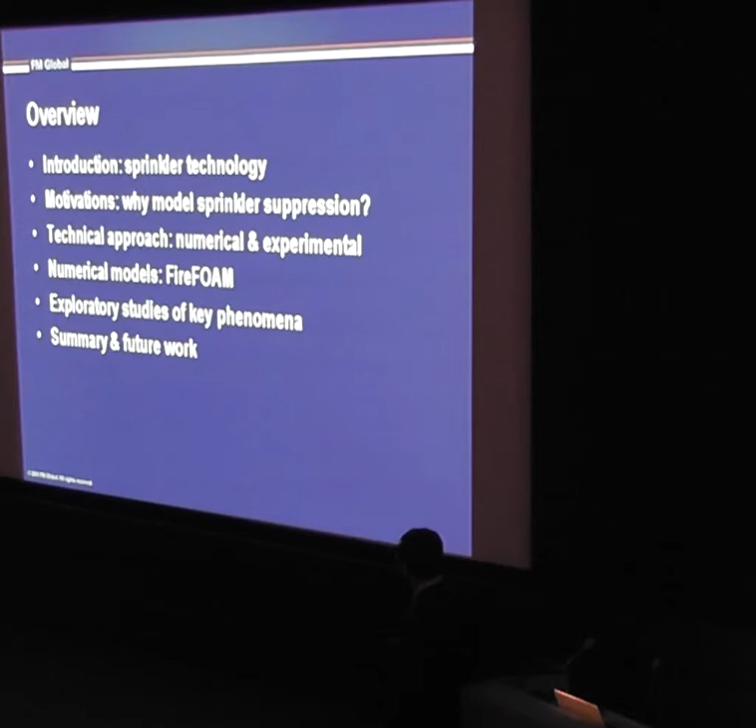The approach that we're taking is a combination of experimental technique and numerical methods. I will describe the numerical model in a very short time because my work is pretty much focused on the experimental side. So I will spend most of the time talking about the exploratory study for the key phenomena and the physics associated with them. I will summarize the work that we have done so far and show you some of the ongoing work we're still doing at FM Global.

First of all, many of you know FM Global. For those not familiar with us, we are one of the largest commercial property insurers in the world. We have about 1/3 of the market in North America, about 1/4 of the market in the world. So our experience is sort of representative of the application of sprinkler in the industry and commercial buildings.

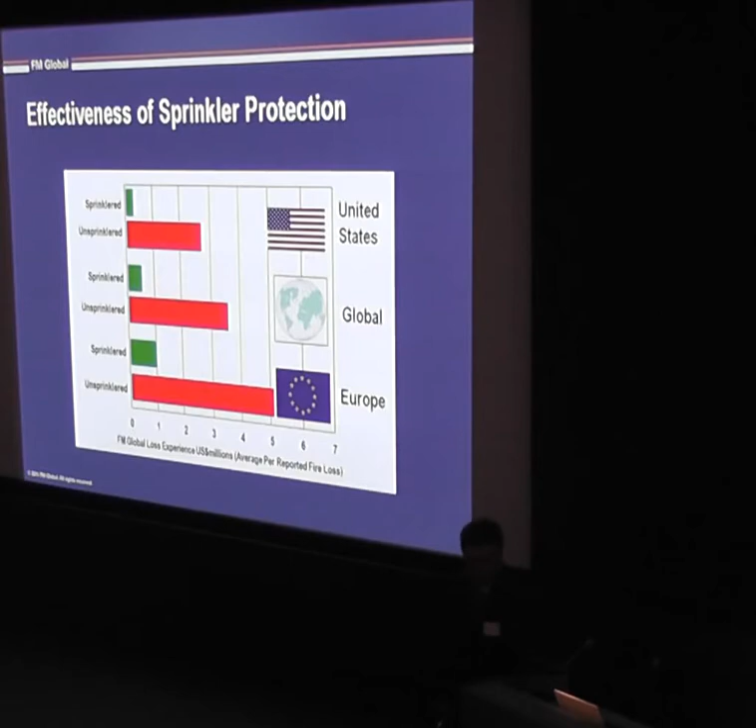No matter where you go, in North America, Europe, or all over the world, you see if you put sprinklers into the building, the protection, the effectiveness of the sprinkler protection is dramatic. It makes a huge difference. So with that, FM Global spent many years - I think Ron mentioned that it started actually in the 1950s, if I remember that correctly. For over half a century, we've done continuous research in this area.

But in the new millennium, we actually ran into troubles. The trouble comes from two different ways. One is that we ran into the limitation of our testing capabilities. Some modern facilities can build storage all the way up to 100 feet tall, and our test facility, which is one of the largest in the world, is only 60 feet tall.

So we basically run out of space. It's hard to imagine you build higher and higher buildings for that purpose, to do one-to-one ratio industry testing. The second issue is a little bit more troublesome for us because it actually comes from the effectiveness of the sprinkler system.

People start to use them more and more, and every time you use a sprinkler for a particular building, people ask you specific questions about that building, that fire scenario. For instance, if you test a rack storage with all these standard boxes in place, and they ask you, what if I have those boxes missing in my storage? Is it going to be worse, or is it going to be better with the same protection you tested?

Same thing with our standard test - we always use about a 6-inch flue space, which is about 15 centimeters between those storage boxes. The real engineers in the field will say, okay, what if I have a box missing, and also I have this flue space all over the place? Some of them may be a couple inches, some of them may be this wide. What do you say about sprinkler protection - is it going to be better or worse? There's a lot of variation from the standard industry test that you can do, and the question is, how do you generalize the results that you have to different scenarios for fire hazards?

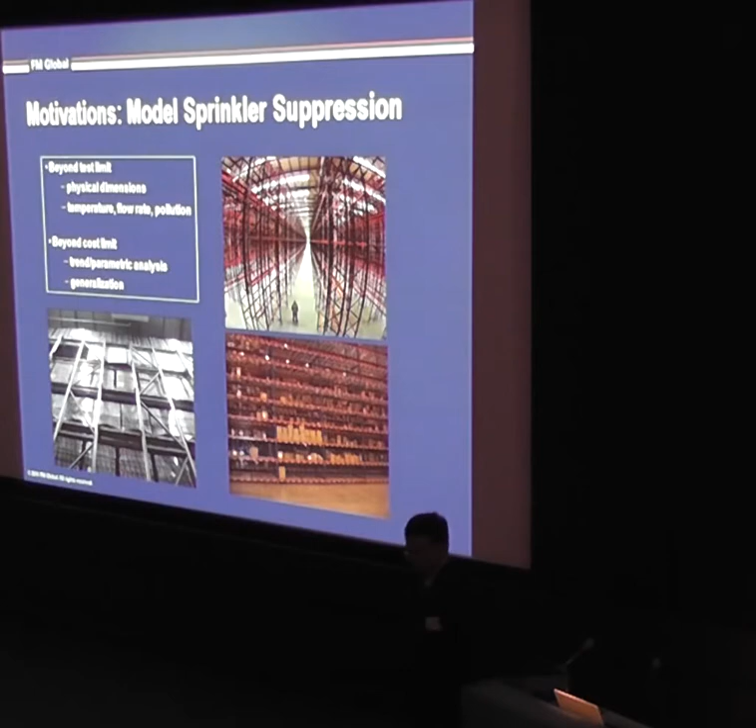But for this kind of test, one particular test typically costs anywhere from $10,000 to $100,000 easily. And the test is only 50 minutes, but it takes weeks to prepare sometimes. So the cost is so high that it's just not practical to do this for every single fire scenario.

What do we do now? Well, one immediate answer to this question is you go to a smaller module of your test array, and you test it from there. The challenge here is that, yes, you can create a smaller array, but from the point of view of science, you actually need to do a rigorous scale model.

You scale down everything - you need a smaller sprinkler, you need to have a smaller commodity. But very often, that's not practical. I mean, where are you going to find that smaller commodity and smaller sprinkler? You can't design new things and manufacture them - that becomes very, very costly.

So what we do is we actually take a smaller fuel array and run this kind of suppression test to apply uniform water flux on top of it. We try to measure the response characteristics of those different fuels in different scenarios and compare them, and we call this particular method commodity classification.

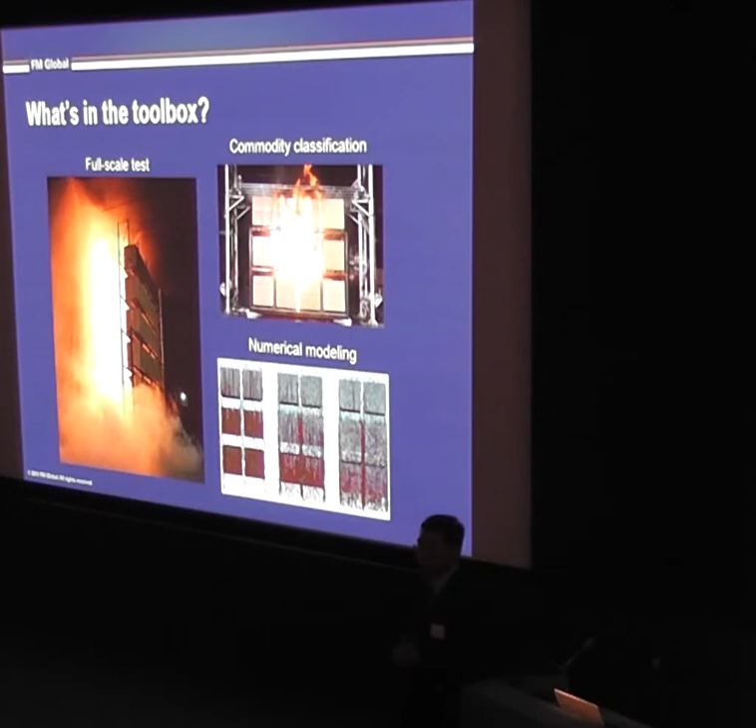But there are many more problems you cannot solve with this kind of approach. What you can do is rely on numerical modeling. Hopefully you can do parametric studies to generalize results with a limited number of full-scale tests and experiments. That's what we're trying to do at FM Global.

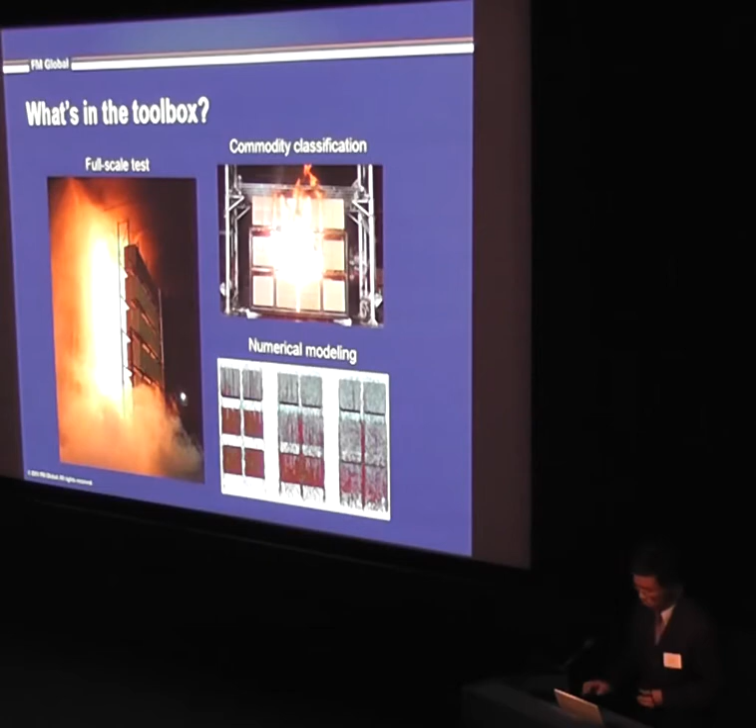Before you can develop any numerical model, there are two things you have to know. One is what is the key phenomena, and the second, what are the physics? What are the equations that you can use to describe those physics?

We find out that the end result—the delivered water on top of the fuel—is very sensitive to the initial property that you assign to the sprinkler spray. So you have to know this.

And then for many, many sprinklers open on the ceiling, you have to know the ceiling flow and the interaction of the ceiling flow with the droplets.

When you go down this trajectory of the spray, you realize that you need to understand the interaction of spray and fire plume. And then if you go further down, now you have the water on top of the solid commodities you need to protect.

Then you need to know the detailed physics and phenomena in this area. For instance, how does the water move? What is the transport of water on those commodities? And what is the interaction between the water, the fire, and the solid fuel?

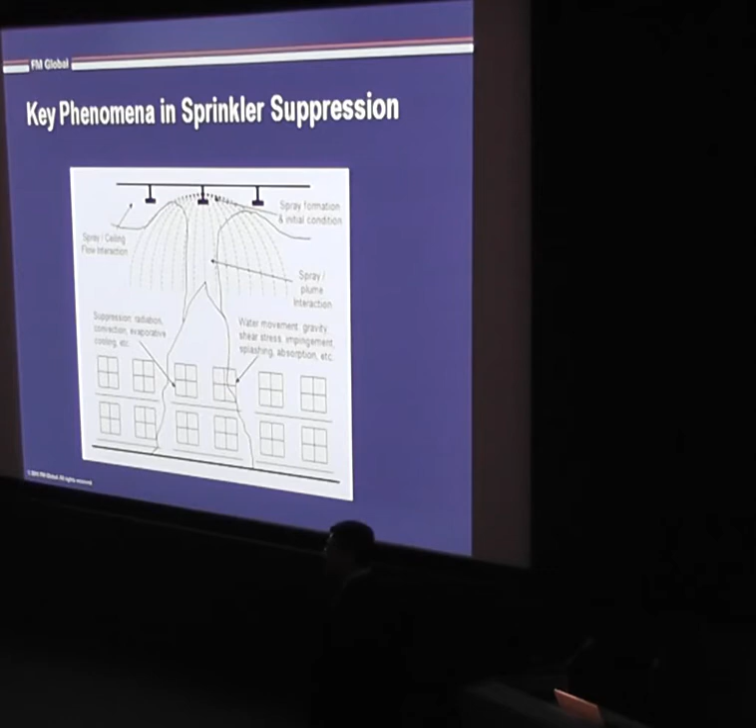So you have multi-phase interaction going on for this part of the problem. You can see it's quite a complex problem—dynamic, three-dimensional, and a multi-phase phenomenon. This is a huge problem for us.

So we decided, in order to have a reasonable description of all the key physics, we need to come up with a basic framework for our model. The model we're developing right now is called FireFOAM.

The four-letter FOAM has nothing to do with the foam that you put out a liquid fire with. It's actually an abbreviation of Field Operation And Manipulation. It's based on the platform called OpenFOAM, developed here in the UK.

It's open source code. We basically have a module to deal with the gas phase—momentum, mass balance, species transport, energy equation—and you have the ideal gas law here to simulate the gas phase.

For the solid phase, we have the heat transfer equation and the pyrolysis—basically the chemical decomposition of the solid fuel into gas. Now, for the liquid part, it's actually a little bit tricky, because if you look at the water—

and most of the time we're talking about liquid, it's water for sprinkler protection—you have the droplets that Ron just described. You need to be able to calculate the trajectory of those droplets and make sure that you get the right amount of delivered water on top of the fuel.

Now, that can be taken care of by the transport of the droplets in the gas phase using a Lagrangian transport scheme. For the water transport on solid, you actually have water flow on the boxes. We developed another module using an Eulerian scheme to simulate the flow on the box surface.

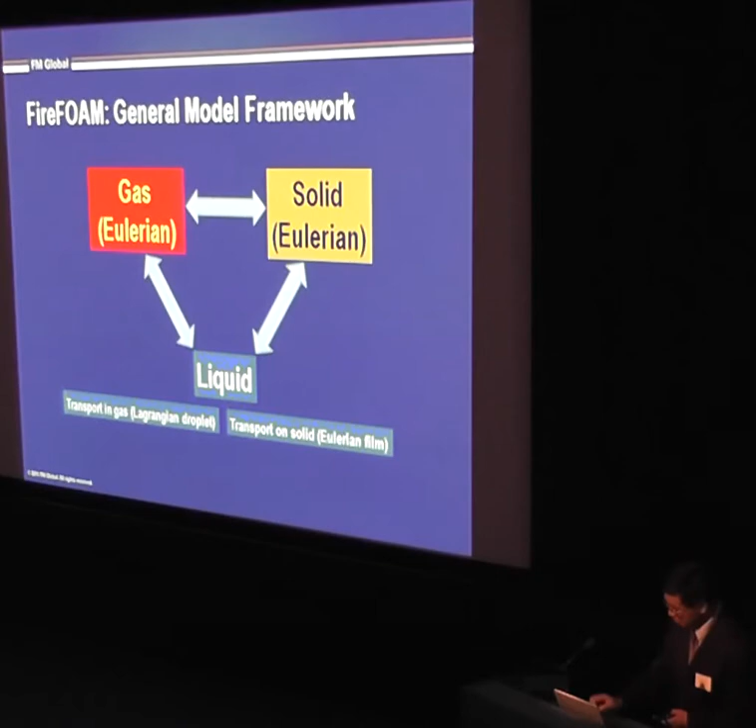So we spent a lot of time to figure out this part, and that will be the focus of my talk today. This is some of the illustrations that we used for the water transport model.

Because of the thickness of the water flow, which most of the time looks like a film, sometimes it looks like rivulets, but no matter which case, the thickness of that film is so small compared to any dimensions in the tangential direction, either the width of the rivulets or the whole boxes. So we decided it's reasonable to simulate the transport of water using a so-called thin film assumption. Basically, you have transport in the two tangential directions on the surface, but in the normal direction, you do all the balance, but the velocity is assumed to be zero.

There are a lot of phenomena going on the film surface. You can have droplet impinging on the surface. You can have splashing of water. You can have evaporation of the water because of heating. You can actually have boiling in some cases. You can have film separation from this.

For instance, you have a box. When the water goes to the corner of the box, you start to have separation. And the film interacts with the solid behind the water film. And you have heat transfer, you have mass absorption. The porous material like corrugated cardboard can absorb water. And you have the shear stress that limits the transport velocity of the film.

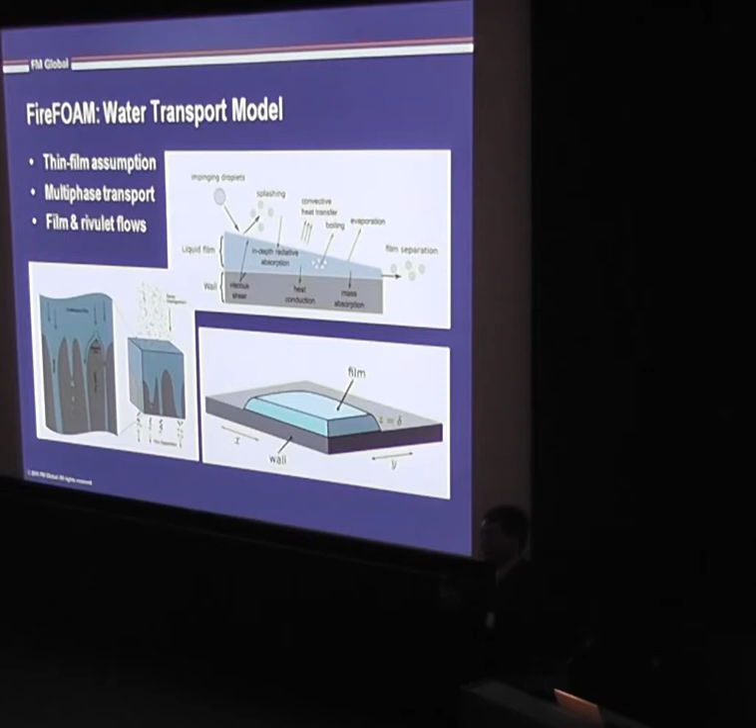The first thing we realize is that it's widely used in all kinds of industries to put stuff in corrugated cardboard, paperboard, and the paperboard absorbs water. So we looked at the water absorption to see if that's the controlling phenomena to stop fire propagation. What we did is we measured absorption of water on top of the corrugated cardboard, and it looks like it scales as the 1/2 power of time versus the cumulative absorption per unit area on the fuel surface. But we also realized a significant impact of the water temperature, because once the water penetrates through the fire, it will not stay at 20 degrees C.

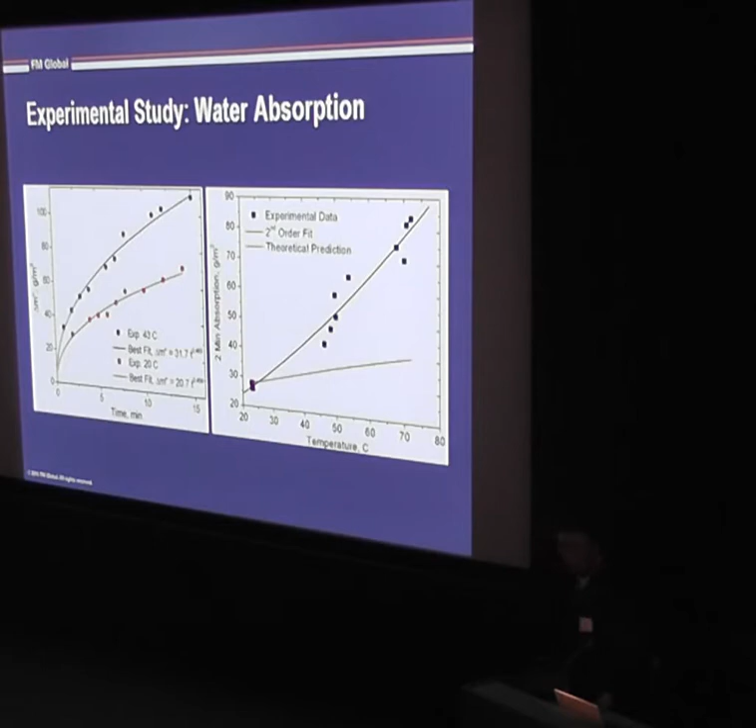It will be some elevated temperature. We also looked at some theoretical estimation of whether or not the change of the surface tension or viscosity of the water can account for this kind of significant change in terms of absorption. But actually, there's quite a large difference. So we're still working on this part, trying to figure out why this happens for the water absorption.

But from the result that we have, the water absorption accounts for, if you take the overall input flow, the amount of water being absorbed is actually quite a small fraction, usually less than 5%. So the absorption does not take the most of the energy that's needed from the fire to evaporate the surface flow.

So what happens is actually the vertical flow on the surface. This is a high-speed camera photo for the water flow on a stainless steel surface. The stainless steel is polished. We have a heat flux gauge here, flush with the surface, to measure the heat flux behind the water film. And then you can see the structure of the water film. It's not that smooth, there's a lot of detailed structures.

So what we did is we used a technique called laser reflection-based technique to try to measure the thickness. And if we have two probes with a fixed distance, we can figure out the transport velocity in the vertical direction based upon the correlation of the film thickness.

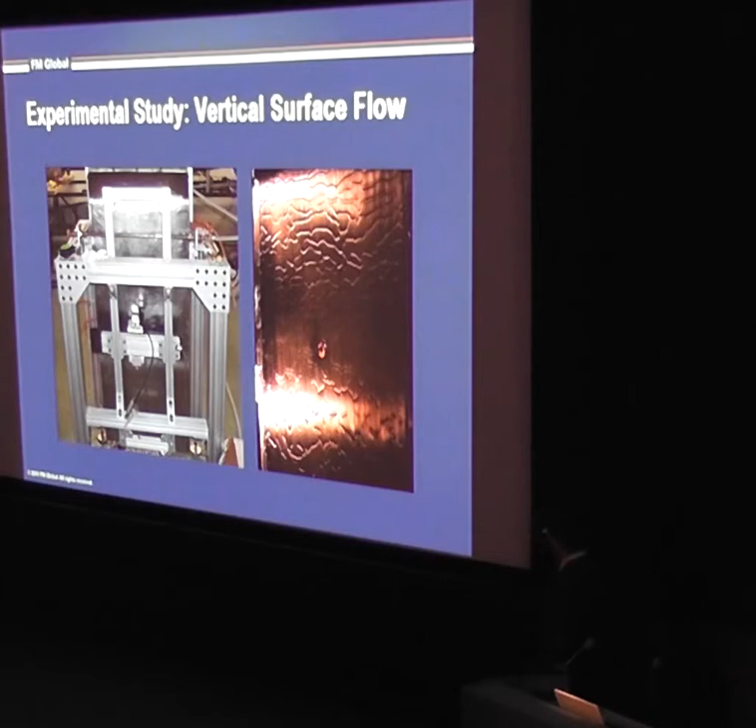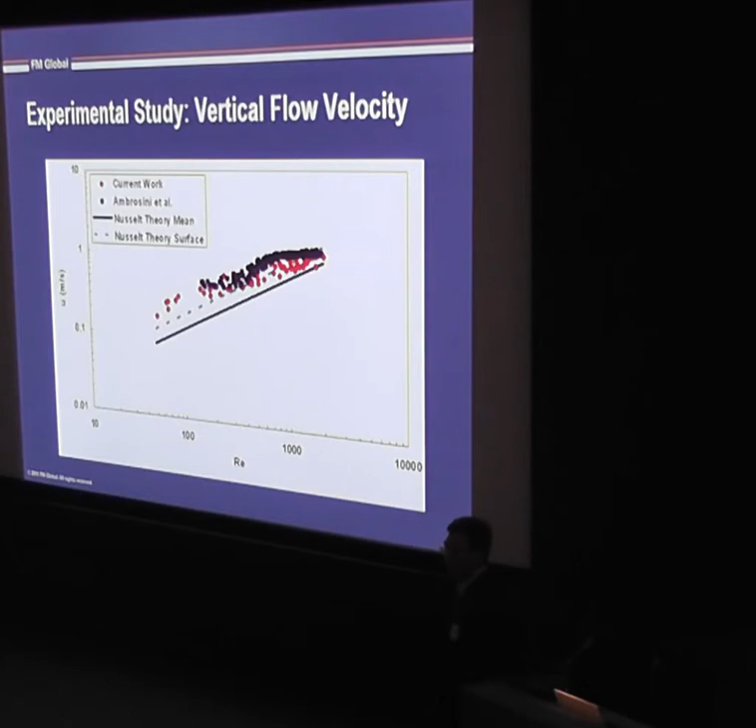So the result that we see from this kind of measurement shows that if you compare the vertical surface velocity of the water flow on a fuel surface, it actually agrees quite well with the classical solution by Nusselt, published in 1916. So we can assume that Nusselt basically assumes it's a laminar flow on the vertical surface. So if you can take care of the vertical surface flow of the water, assuming it's laminar flow, you get a reasonable simulation on that part. That's what we use right now in our code.

When you have the water flow reach the bottom of a commodity or a box, you start to have flow separation. The separation phenomena is controlled by the force ratio. Basically, you have gravity and inertia pushing the water straight down, but surface tension drags the flow in the horizontal direction. The ratio of those two gives you some indication how the water is going to flow right at the corner.

With a very low Reynolds number, which is basically the vertical flow rate normalized by the viscosity, you have pretty much all the water going in the horizontal direction. Eventually, the surface friction will slow down the flow, and it will just stream down to the next tier.

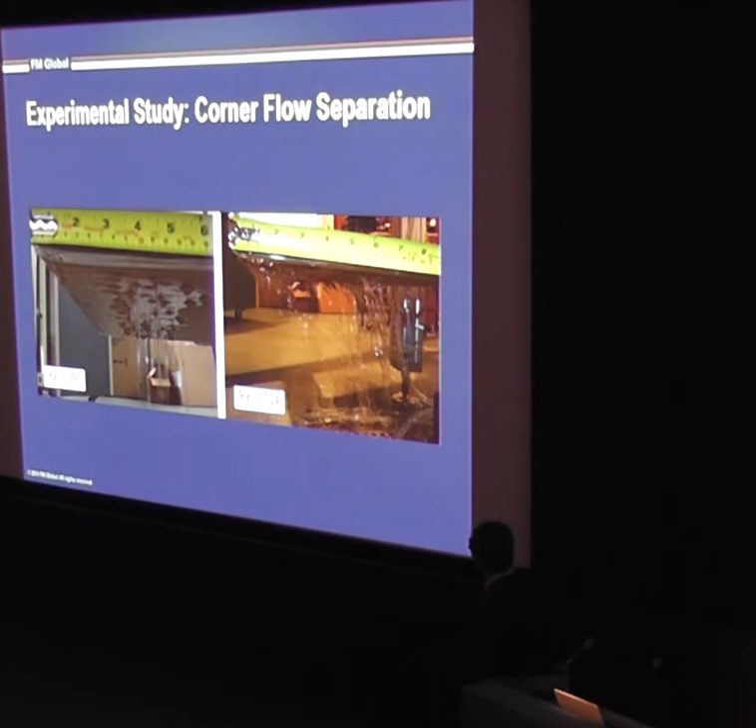But if you have a high flow rate, you start to have separation. You also have a portion of flow going quite a bit into the horizontal surface at the bottom of the box, and the angle of this separation has a lot to do with the curvature at the corner.

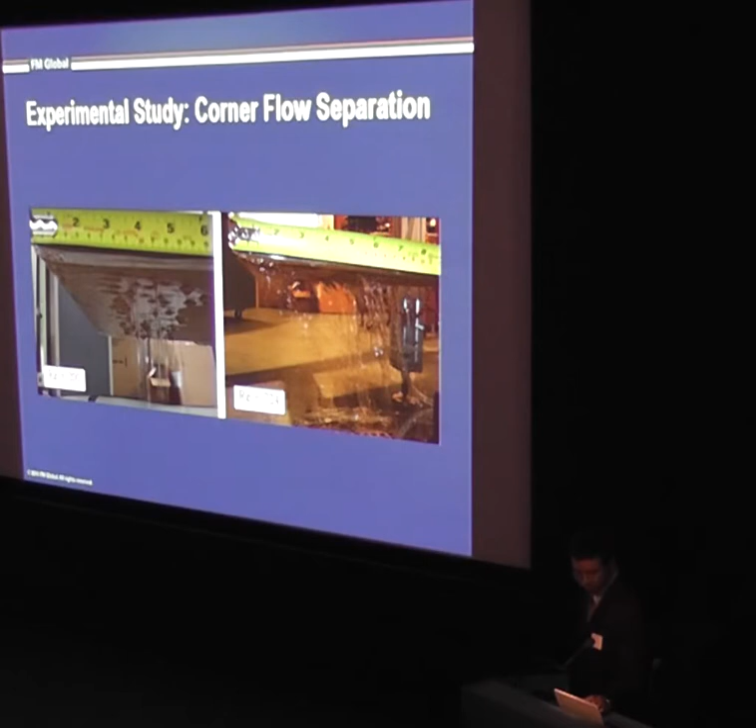So we developed some empirical model to take care of this part. Now we know the absorption of water by the fuel, we know the flow phenomena on the surface, and we know how they separate at the corner. We want to put them all together to look at the transport of water in the rack storage.

We're simulating the rack storage by using a rack and boxes put on top of the rack. We put water collectors below those boxes to collect water on the vertical surface, to see whether or not our model can simulate reasonably well the transport by including all the sub-models.

That tells us that because most of the water flows on the surface as runoff water, not being absorbed by the commodity, the wetted surface area is probably a controlling factor of the fire propagation.

In other words, if you have a whole area covered by a film flow, and you calculate the latent heat of the water multiplied by the flow rate, you estimate how much energy you need actually to get rid of this water. It's a very significant amount of heat flux you need. So if you can have water fill the covered portion of the boxes, you probably have this box well protected.

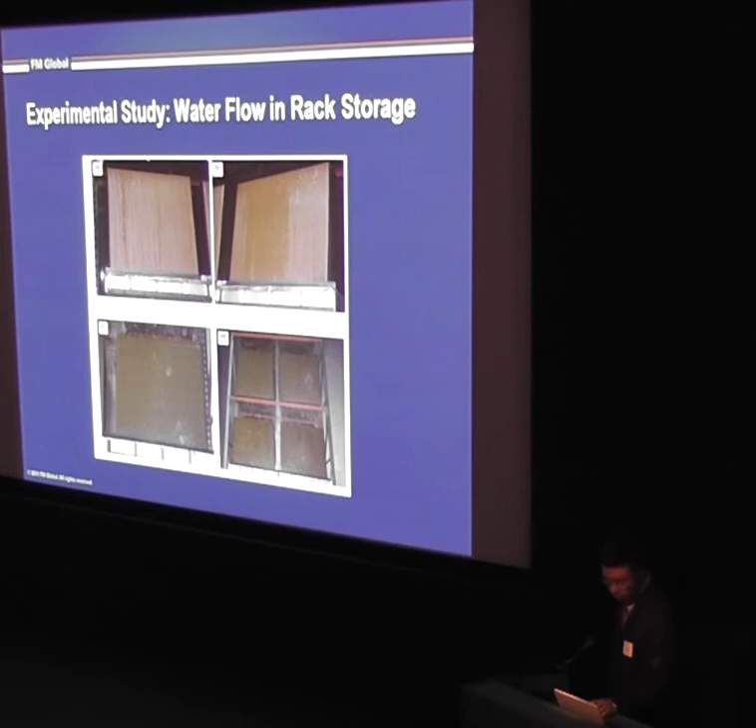Otherwise, for this case, you have a lot of surface area exposed to the fire, and the fire can probably propagate across this surface. That's what we see in our experiment.

Now, all the experiments I talked about so far are basically cold flow experiments. They take care of the transport part of the water flow. In order to reach the final stage where we can predict what happens between the fire, the water, and the solid fuel, we need to look at more complicated phenomena than the cold flow.

What we do is design experiments of increasing complexity to tackle this problem. One level more complicated than the cold flow is we set up a vertical panel to apply the water on the surface of the panel, and then we simulate the fire using a radiant panel on one side.

Now you have the fire heat flux simulated as a radiant panel, which is a constant heat flux. We want to look at different water flow on the surface so we can see what is the rate of evaporation created by this heat input, and what is the burning phenomena if we actually have a fuel surface instead of an inert surface.

One interesting phenomenon we saw in our experiment is that once you apply the heat flux on the surface—this is a steel panel—you start to see the transition of the flow pattern from film to rivulets. We realized that in our model, we have to be able to describe both flow patterns. At the beginning, we thought we'd be fine looking at just the film flow, but we realized that once the film flow changed to rivulets, we need a separate model to deal with the rivulets.

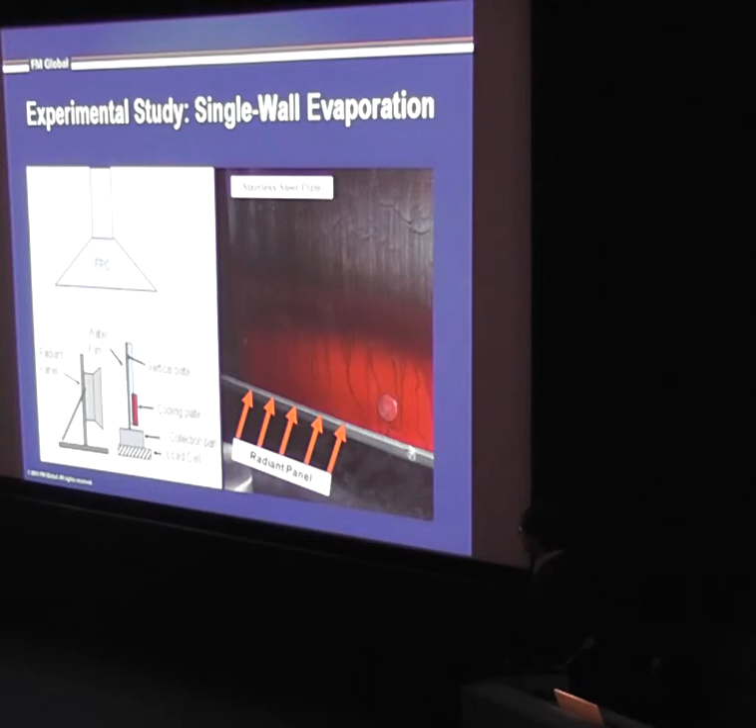So we look at this kind of experiment to help understand the evaporation rate, for instance, on a particular surface. This is a 41 centimeter by 46 centimeter area exposed to the radiant heat flux.

Different radiant heat flux normalized by the water flow times the latent heat of water, and this is the evaporation rate normalized by the inflow condition. We see that actually all the data collapse quite well on a single curve. As you have more and more energy input, the evaporation increases, not exactly linearly, but it's a monotonic increase.

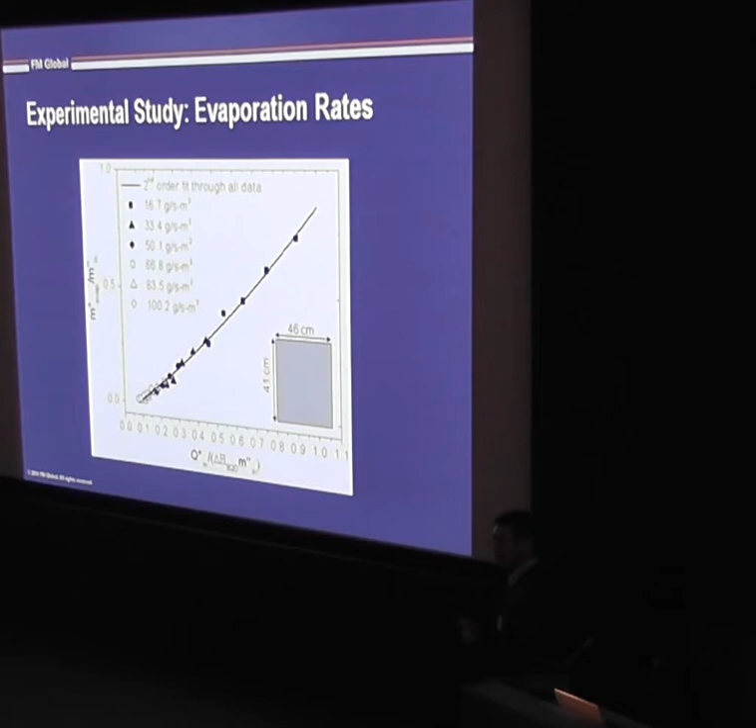I want to emphasize this particular result is probably specific to this test configuration that we used. We don't expect this kind of curve can be generalized to any vertical surface. But anyway, this is a good set of data for us to use to validate the model, to basically evaluate whether or not you can calculate the evaporation part with a reasonable accuracy.

The evaporation is only part of the story. Another part of the story, like I said before, is the transition from film to rivulets. That's controlled by a phenomena called Marangoni effects. Basically, the surface tension increases as you have the temperature gradient across a certain area. We also look at this phenomena.

The experiment that we did is on a vertical surface. We apply the water with a fixed water flow first, then we adjust the distance of the panel until the point where we see the transition from film to rivulets. And that's how you get the critical heat flux that can change the water from film to rivulets. This is another set of data that can help us make sure the model has a reasonable simulation between the two different flow patterns.

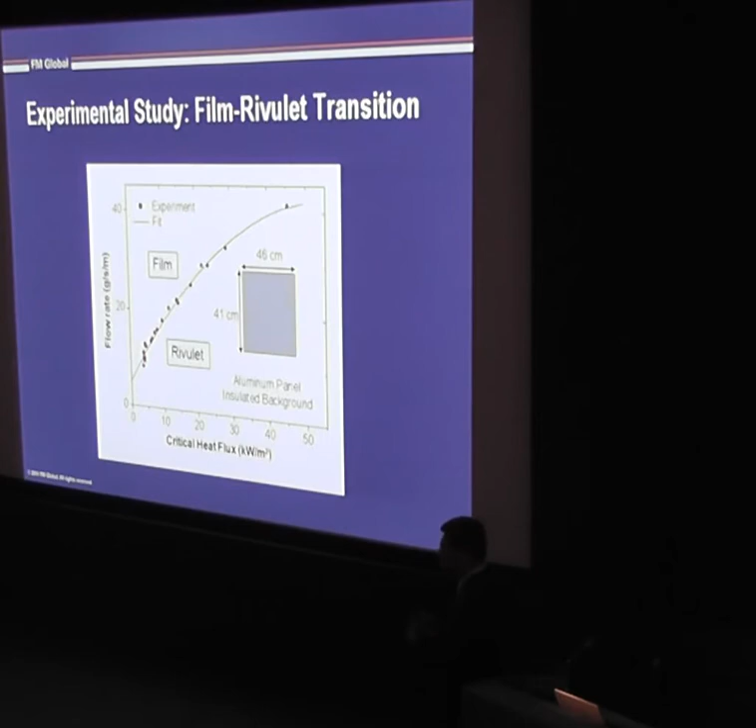Like I said before, we design all experiments with increasing complexity. Once we go beyond the inert panel, we need to actually put a fuel surface on the panel. We apply the water on top of the surface first, then we have the igniter at the bottom, and then we apply the radiant flux on the other side. This kind of experiment allows us to look at the burning characteristics subject to the application of water on a single surface. So it's still very simple geometry, well-controlled experiment, but it gave us a lot of insight into how the fire will propagate subject to a certain amount of water.

So this is another set of experiment, more complicated than inert surface flow, but gives us good experimental data to validate the model.

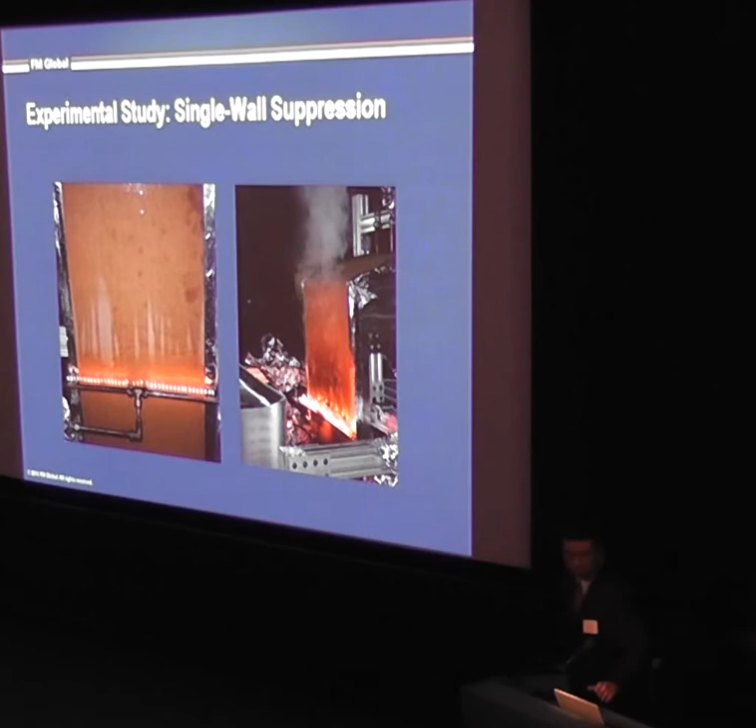If we want to go one level in terms of complexity, we need to look at another geometry called parallel panel. Ron spent some time talking about this geometry. Basically, two panels: you put fuel on the surface of the panel, and you have a fire source at the bottom. I think Ron's work is focusing on the part which we call free burn. Basically, you just let the fire go, and see how fast the fire can propagate in the vertical direction.

In our suppression study, we actually apply the water on the two panels first, make sure the water flows down in a steady state with a controlled flow rate. Then we start a fire and see whether or not the fire can propagate to the top of the fuel. We also measure the heat release rate with respect to time for different water flow rates applied on the surface. So we change the free burn parallel panel experiment to a suppression test.

It's still very simple geometry, but now you have much more complicated physics going on. Because from the fire, you have heat transfer to the surface by radiation and convection. For this scale of fire, the heat transfer is usually dominated by radiation. The radiation changes the flow pattern. Even if you apply a film flow on the surface at the beginning, very quickly the heat flux will change the flow pattern from film to rivulets.

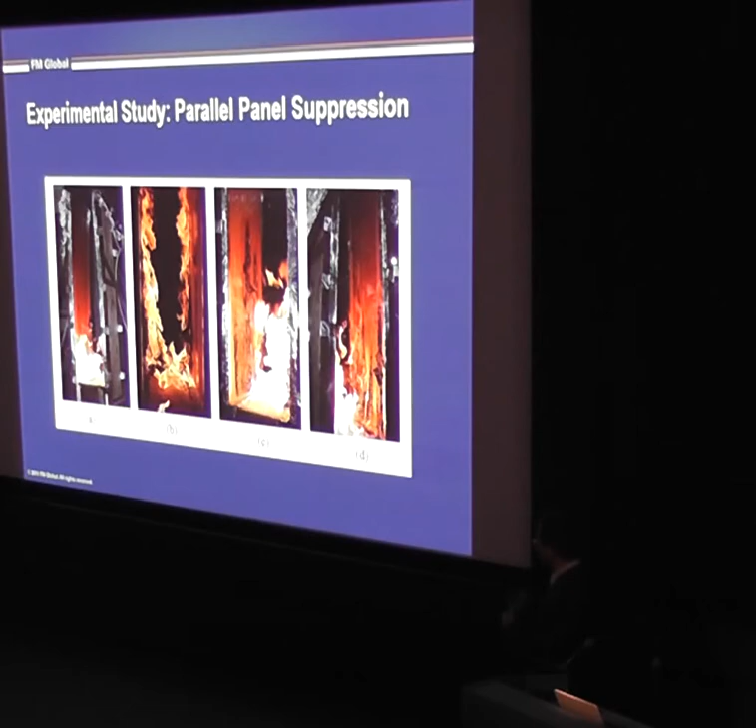At this point, if our model can successfully predict this kind of behavior, we feel that we have enough physics in our model to help us capture all the essential processes in sprinkler suppression. So we pretty much finished the exploratory phase of our study, which is basically focused on evaluation of experimental technique and looking at different designs of experiments to see what kind of data we can get from those experiments and whether or not they're suitable to validate our model. So that's the exploratory phase of our work.

To summarize the exploratory work we've done so far, especially on the experimental side, we did a lot of work trying to figure out a better way to evaluate sprinkler technology. In order to improve sprinkler technology, we need this tool. The approach we're taking to develop this new tool is to combine both experiments and numerical models.

We've been working in this area for almost 3 years, and we're expecting in probably a couple more years to have the first version of our basic model to help model the suppression physics of a sprinkler application.

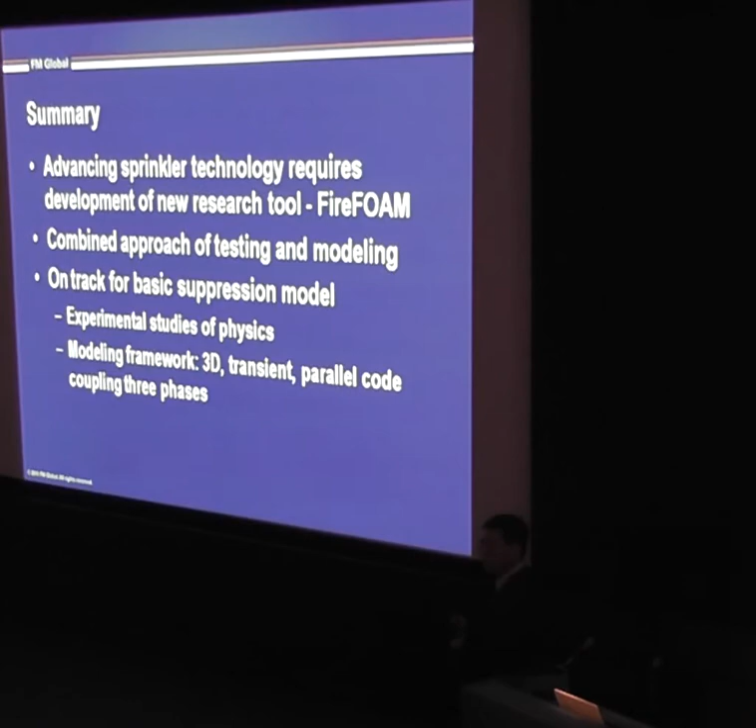What we're doing right now is looking into some more phenomena that we think are also important in our study. One phenomenon we didn't look at in the past, but are working on now, is called splashing. Basically, you have a droplet on a heated horizontal surface, and you get this splashing.

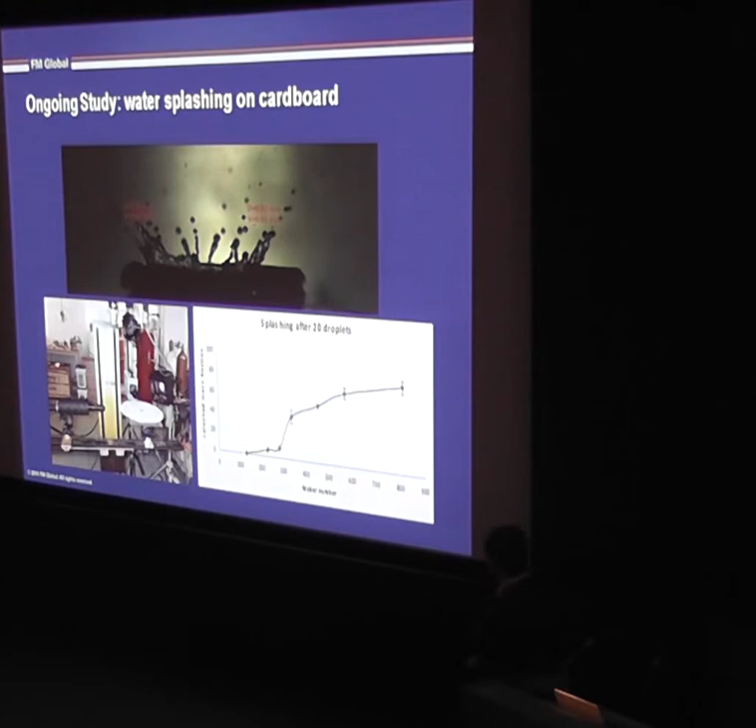We realized that when you have many tiers of commodities stored in a warehouse, for instance, when you apply a certain amount of water on top, the water actually gets lost every tier you go down the rack storage. One controlling factor is splashing: the water splashes on the edge of the boxes, and you end up losing water into the flue space. So we're looking at the splashing phenomena right now.

Another thing we're working on is that the single wall suppression and evaporation tests we did in the past were limited by the power available in our experimental apparatus. Now we have a new apparatus called the intermediate scale calorimeter. It's basically a very large panel with smaller burners on it.

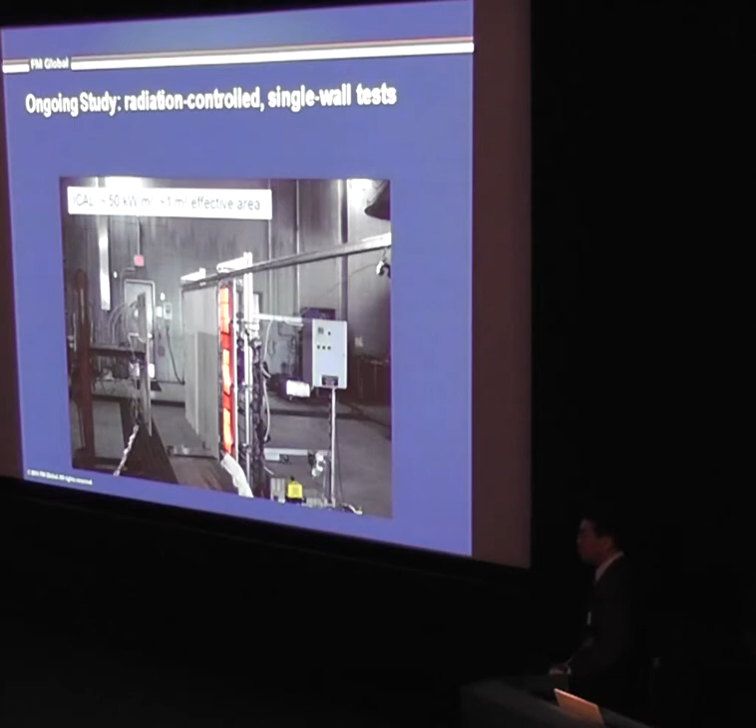In front of the panel is a water-cooled shield, and you set up your vertical panel on this side. When you start the experiment, you slide the shield away and expose the fuel surface to radiation. We can achieve radiation on the order of 50 kilowatts per meter square over an effective area of about 1 meter square, giving us a reasonable scale to simulate one module of our box commodity.

We're continuing our work in the parallel panel area, trying to come up with ways to achieve a more uniform distribution of water flow on each panel. On paper, you apply water on the vertical surface, but in theory and practice it's very difficult to create a uniform distribution on the two panels. So we're trying to figure out ways to improve that experimental technique.

This is some of the results we have. As you increase the water flow, you get lower and lower heat release rates. This is the response of the interaction between the fire, the water flow, and the pyrolysis of the fuel. So this is a good set of data for us to evaluate our model.

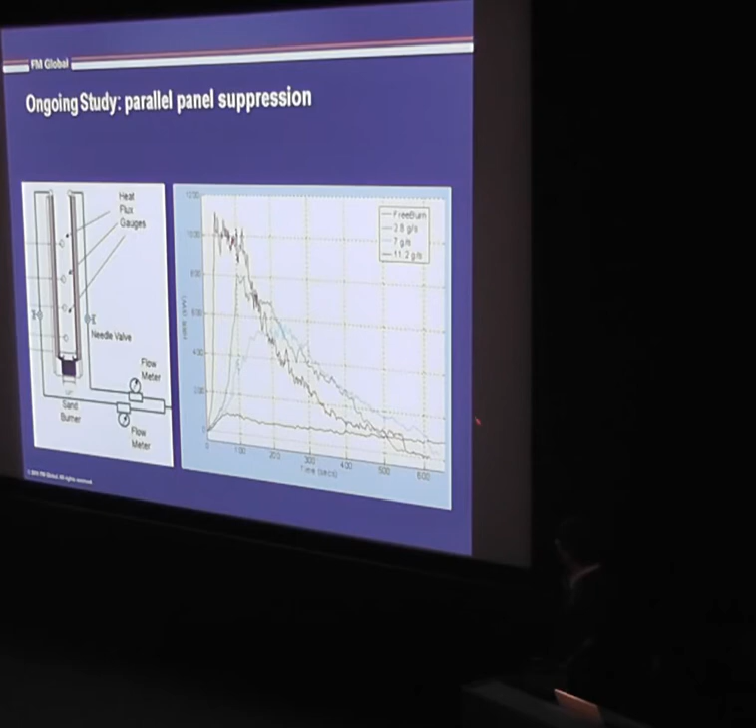Eventually we have to move beyond simple geometry like a parallel panel. This is what we use for more complicated model evaluation and more complicated fire scenarios. We call this rack storage. Basically, you have boxes, and each box is about 1 meter cube.

Inside the box is a metal liner fitted to the box, to make sure the box can't burn through. We set up this rack storage, light the fire in the middle, and apply the water.

We can apply a uniform water flux at different rates on top of the fuel array, and open up the water at different times in the growth curve of the fire to observe the suppression phenomenon. If you apply a lot of water, for instance 12 millimeters per minute, the fire is pretty much suppressed. But if you apply very little water, for instance 4 millimeters per minute, the fire dips a little bit and eventually goes out of control.

Those tests are highly repeatable. When we repeat the test, we get very repeatable curves. This is a good set of data for us to use for model validation of this kind of complicated geometry.

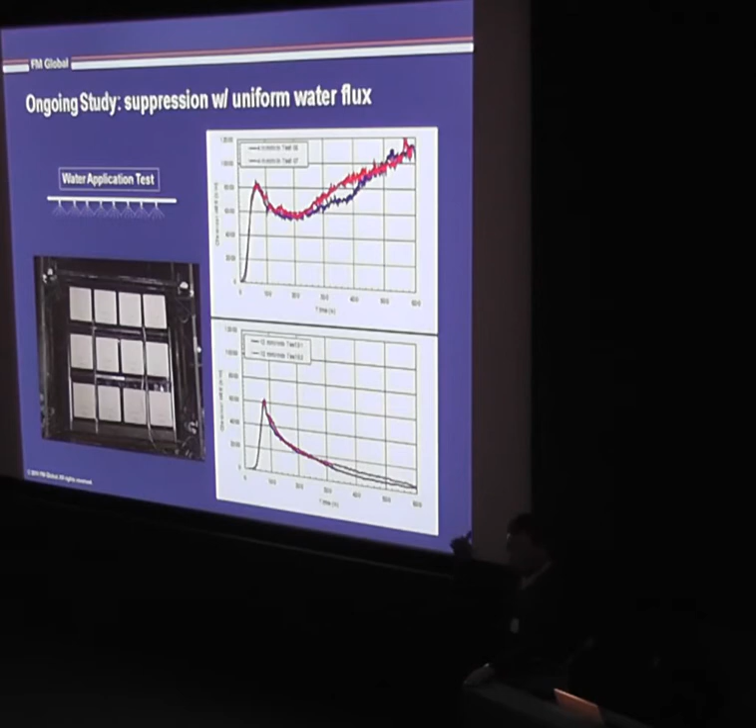For this geometry, we're still only evaluating what's happening below the top surface of the box. We need to know what's happening between the box and the sprinkler. That part is called ADD, actual delivered density. Basically, if you have a sprinkler and turn it on with a fixed steady-state fire, you want to see how much water can penetrate through the fire and reach the collection pans at the bottom.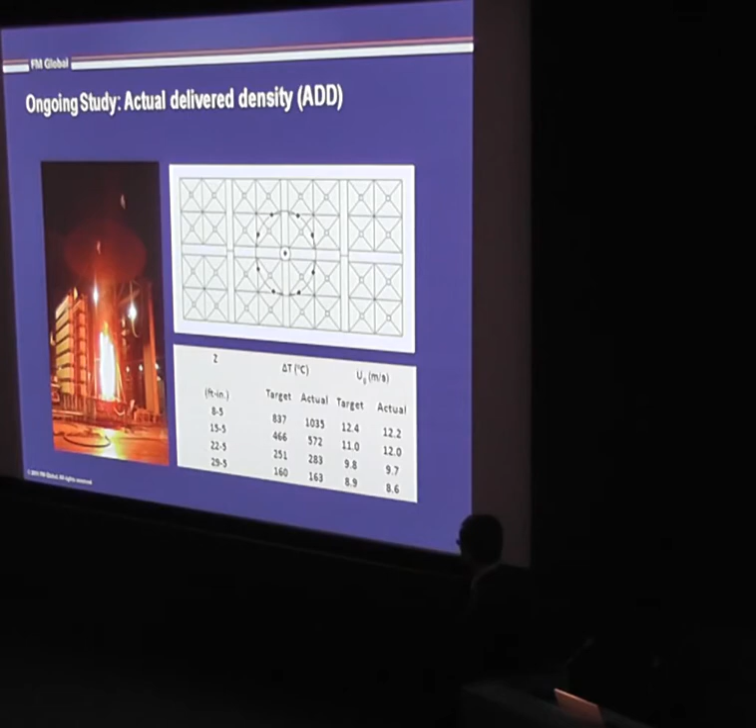The final evaluation of our suppression model is a real sprinkler test. We set up commodities under a ceiling, start a fire, and install sprinklers on the ceiling pipes to evaluate the model based on this kind of experiment.

This kind of experiment has a lot of uncertainty associated with it. Much of the uncertainty comes from the activation sequence timing of the sprinkler, because that's something you just cannot control. It's very difficult to repeat.

So we're still working on ways to measure the global quantity of fire propagation, not just a single point measurement. Even though we put a lot of thermocouples and velocity probes in the fuel array, we try to look at the global quantity, either integrated or across a certain cross-section, to figure out where the fire is at a certain time and how to use that to validate our numerical model.

So this is probably the final experiment that we need to run to evaluate our suppression model.

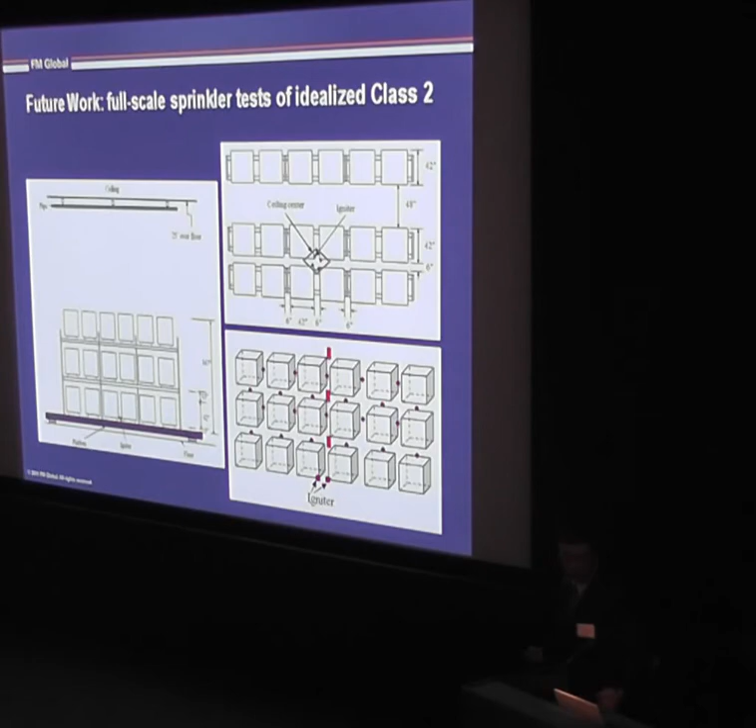To summarize our future work: we'll work on cold flow transportation, looking at the splashing phenomena, rivulets, film flow, and corner flow. One interesting finding is that when you have a charred surface, the flow is very different than with a smooth surface, so we have a dedicated project to look into that.

We also look at single wall radiation controlled experiments with new capability of higher radiation heat flux that we can apply. The final validation for this numerical code will be the parallel panel geometry, the water application test like this, and the full-scale test like this.

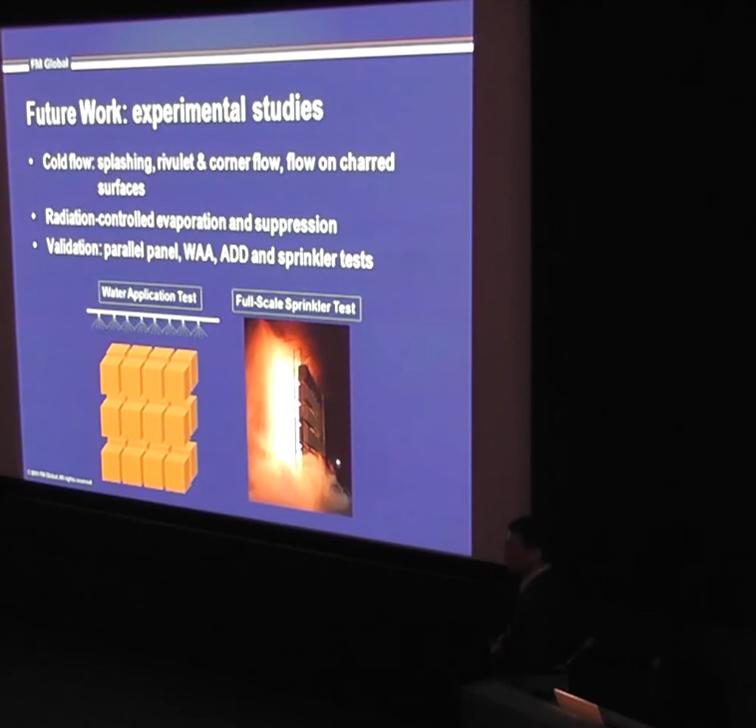We think if we move along this path with all the experiments designed in a way that controls the phenomena, with increasing complexity from one step to the next, we should be able to have more confidence in our model to simulate fire suppression.

In terms of model development, we have a continued effort to evaluate our model for separate effects, like splashing, water flow on vertical surfaces, or single wall experiments. We also have validation on the water application test and the full-scale sprinkler test. At this moment, all the components—the liquid phase, the gas phase, the solid phase—are coupled.

We did some very preliminary study with our numerical code, and we saw qualitatively that when the fire burns with an 8-box fire, if we apply a lot of water, the fire actually goes out. But if we apply just a little water, the fire keeps burning at a certain burning rate.

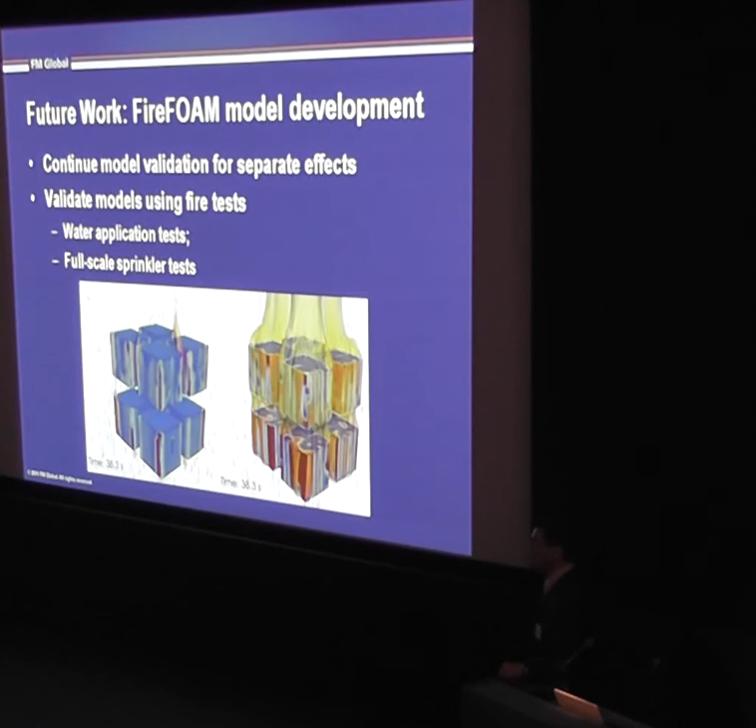So this gave us some level of indication that the model is working qualitatively. But there is a lot of work we still need to do in the future to establish some sense of confidence level regarding the suppression model.